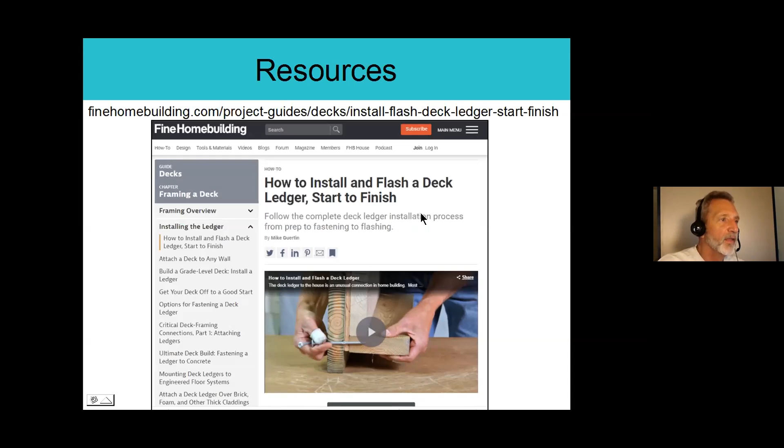Here's another one from a deck that Justin and I built back in 2012. So that was 8 years ago now. It seems like yesterday. So the process is pretty much the same there as well.

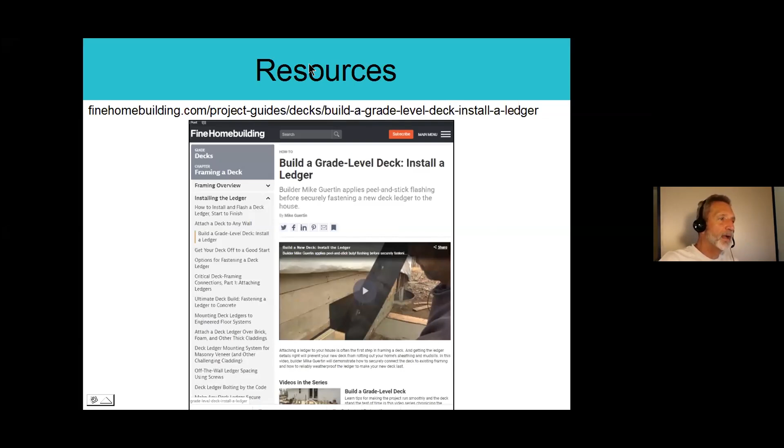I want to harken back a little bit to code things just to give us some grounding on what the code calls for and what it tells us and what it doesn't tell us, because a lot of things in the code can be confusing, or in some cases you don't actually know where to find the parts that apply to deck ledgers. There's one table, well, a lot of tables in the code.

I'm going to be referring to the 2018 International Residential Code, mainly because it's the most current, though we'll be coming out with the 2021 code by this coming August or so. It'll be available, and I expect this to be the same. But this in the 2018 code has been the same since, I think, 2009.

The only portion of the deck code that refers to flashing is a footnote to the table that gives the spacing for the fasteners, 1/2 inch through bolts and lag screws. Down at the bottom it says in that footnote, ledgers shall be flashed in accordance with section R703.4 to prevent water from contacting the house band joist.

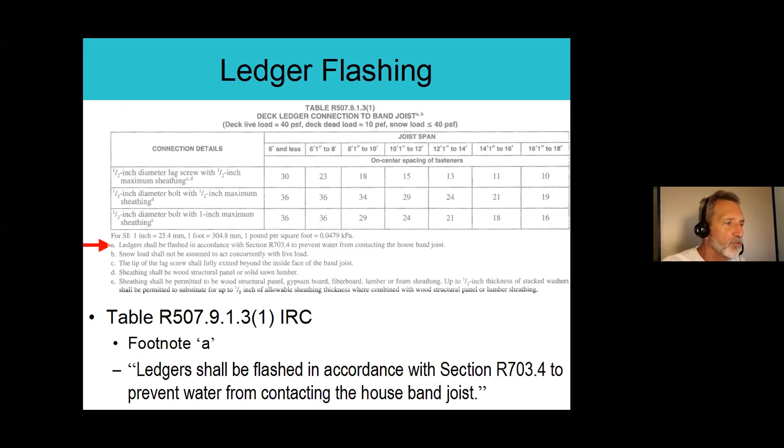So it doesn't tell us specifically what to do. Like a lot of the code portions, it'll tell you how many nails to put somewhere, how big something has to be, or how to install it. This just gives us a performance criteria. Then when we go and look at 703.4, there's a couple things that you want to pay attention to.

Let me go through this quickly. It wants a corrosion resistant flashing installed shingle fashion, meaning the upper part goes over the lower part, naturally the way you want to shed water mechanically. It's there to prevent water from getting into the wall cavity and damaging structural framing components.

Self-adhered membranes can be used as flashing, but they have to comply with an AAMA standard. Most flashing tapes used for window flashing would actually fulfill that requirement, and the same with a lot of roofing membranes. Even if not specifically designed for decks, you can use those as well if you decide to. You can also use fluid applied membranes.

The important part I want to point to, which I'll show in the slides, is that flashing shall extend to the surface of the exterior wall finish. So when we flash that ledger, we have to think about not only the top of the ledger and flashing over the top, but also what's happening at the bottom of the ledger, under the ledger.

It's not so much the case if you're building a grade level deck, but if you're building a deck that's going to have siding beneath it—say it's got a stem wall beneath it, or it's a deck on a second floor—then you're going to want to pay close attention to how you flash that.

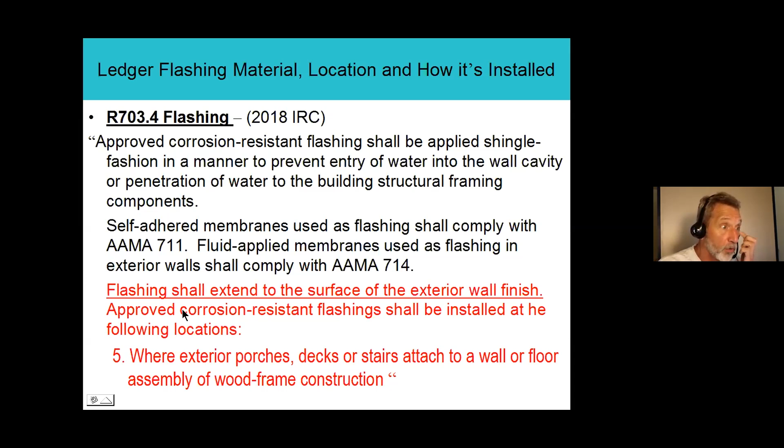Going a little further, and this is only in the 2018 code, in the deck code portion, it says flashing shall be corrosion resistant metal of nominal thickness not less than 19 thousandths of an inch, which is roughly 26 gauge metal, or approved non-metallic material that is compatible with the substrate of the structure and the decking materials.

The important thing there, and why it's italicized, is 'approved.' Whenever you see approved in a code section like that, it means approved by the local official. So the local official has some authority there when it comes to which flashings we can use.

In some cases, there are self-adhered membrane style flashings which, from the manufacturer's standpoint, are approved for use as primary flashings. But it still would need the thumbs up from your local official. That's a good thing to clarify with them before you actually start flashing a deck, if they're going to be doing an inspection on that.

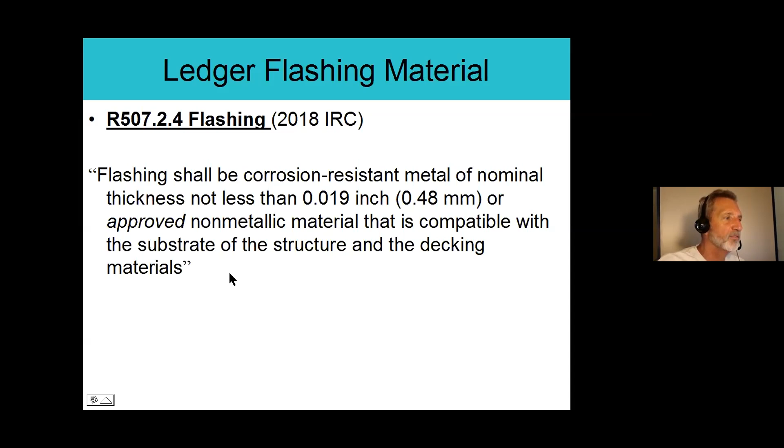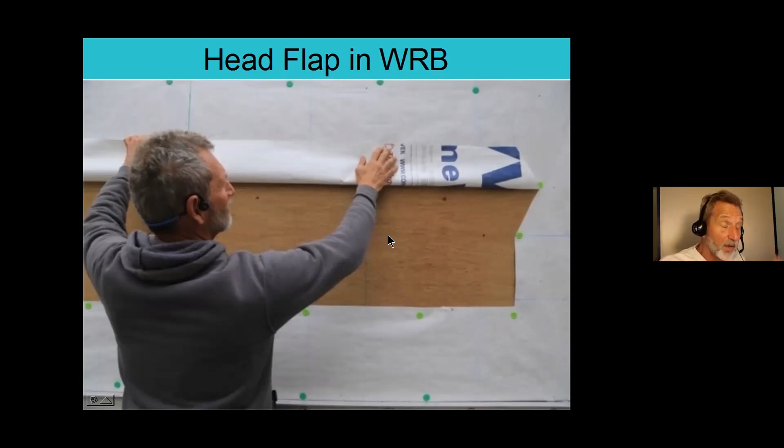Then I'm going to apply a piece of peel and stick behind the ledger. That's going to be my backup and my security policy to prevent the water from getting into the wall in the event anything happens to my flashing system above.

So the sheet that I cut is going to be 3 to 5 feet long. Now, usually I work alone or just with my brother or a helper. Though you can apply the membrane and roll it out across your whole area where the ledger is going to go, I find it's a lot easier to work in wingspan length pieces, 3 to 5 feet wide, something you can manage, especially on a hot summer day. You don't want to be dealing with something sticky getting stuck in the wrong spot, because you want as much control as possible.

Now the sheet itself, I make it 3 to 6 inches wider or taller than the height of the ledger board. So if I was using a 2x8 ledger, which is nominally about 7 inches, I'll make this at least 10 inches, and maybe up to 12 or 14 inches tall overall.

And then what you see me doing here is I'm going to take a straight edge and a very sharp knife, and I'm going to score just the release paper on the backside, or the release plastic, so that I can leave part of the release liner on the back portion, that bottom couple of inches.

That's going to enable me later on to integrate any of the siding below. That gets back to that code section where you have to drain all of your flashing out to the surface of your cladding, and this is going to help me do that.

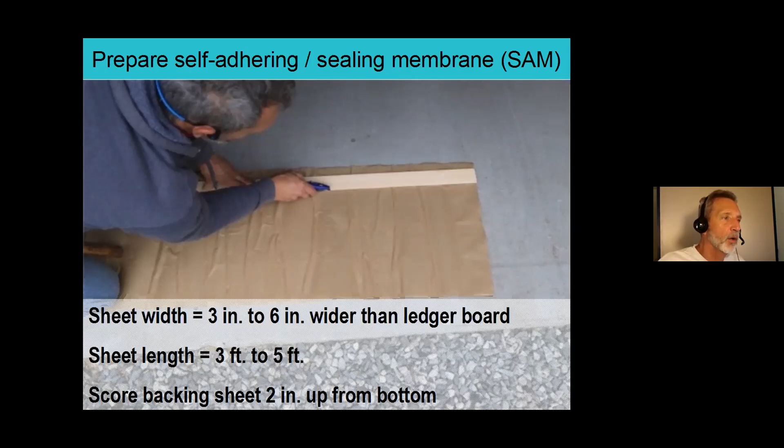Then I backfold the piece after I've made that score, so I can ensure I've got two separate pieces, and there are no little hairs of that backing sheet still stuck to the lower portion.

Now I've got a little video, if this works. This was a video we did at the Builders Show of the Olfa top sheet cutter. I'm just going to play this and see if it works, and that way you can see an alternative to using a sharp knife. There's actually a tool for that.

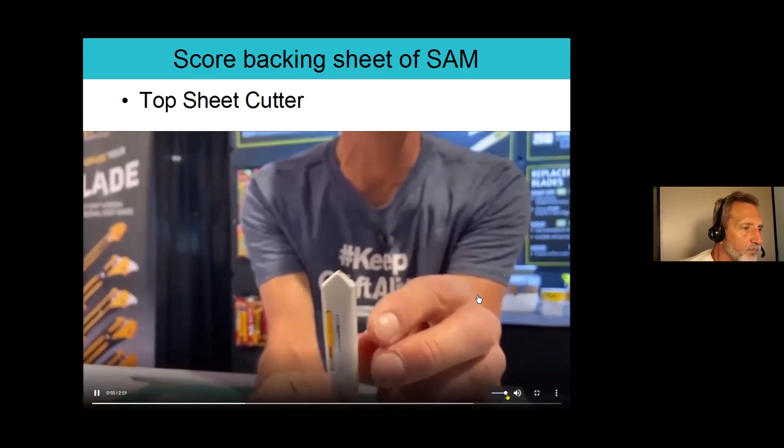It's got a knife blade which extends 1/32 of an inch when you push the slide button up. You can kind of see it here, it sticks out a tiny, tiny bit. And then on the back side over here, it's got a pressure slide, and what that does, depending on where it is, is put pressure on the tip of the blade, so it will control the depth.

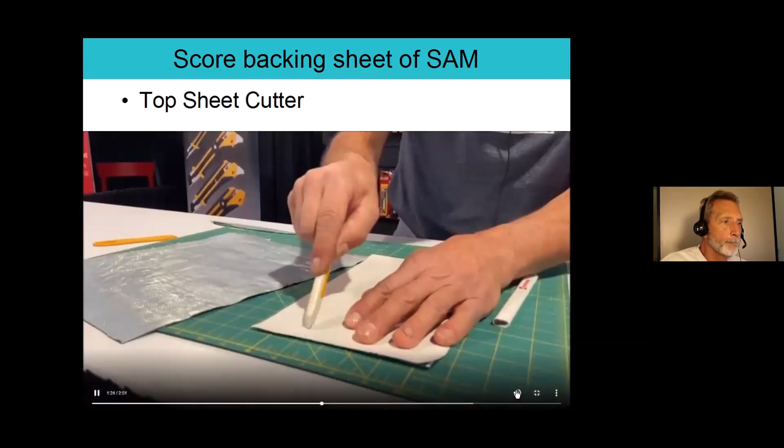So if I'm cutting through the thicker paper backing material on, say, this DuPont or Grace Ice and Water Shield, I'll push that all the way up. And now when I make a cut, it cuts just through the paper and doesn't cut through further.

Oops. Well, that's funny. I can hear it, but it sounds like some people can't hear it.

With this thinner plastic release paper, I'll dial this slide back just a little bit, and then when I go down and cut, it just scores through and doesn't go through into the adhesive, and now I can peel that off.

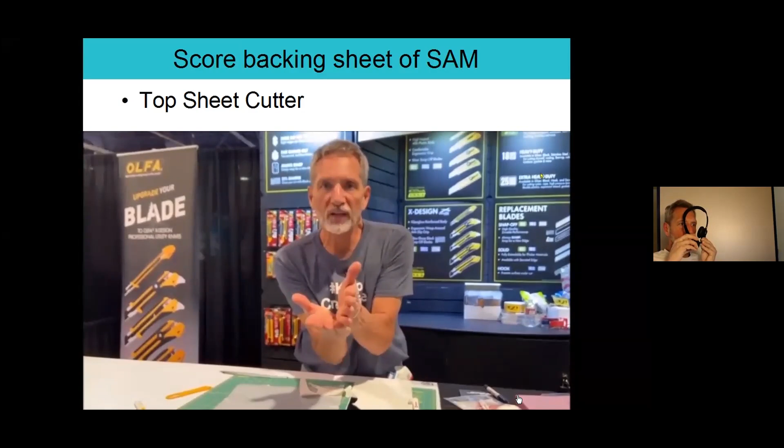Now, not that you'd ever do a curved line, but if you want to get an inside corner really tight, this is the way to go, because you can make a nice straight cut with a straight edge, and then peel that off, the release paper. You can leave the other piece on, and now I can fly that sticky side into that inside corner, bond it to, say, a wall, then lift up the other portion that goes down, say, on a roof, peel that release paper off, and then stick it down.

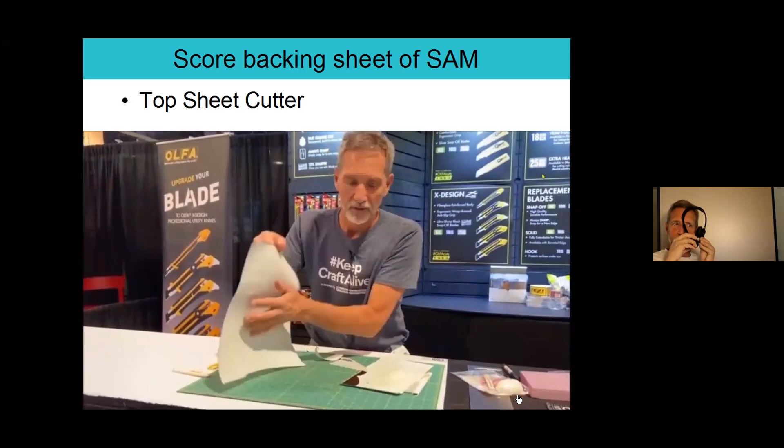It's got a nice... well, don't know if everybody could hear that or not. I tried to curl my microphone into the headset to see if it would help. Yeah, we could hear that, once you put the boom in. Yeah, it was just coming through your headphones.

Sorry about that. So basically, it was a tool - a specialty knife made for cutting coupons. That actually works really good for scoring the backing sheet without cutting through the face of the material. So now you can see it peeling off most of the release paper, the large piece, leaving the release paper down at the bottom, and then sticking that up on the wall.

Make sure that the top has about an inch or two that's going to be above where the top of the ledger is going to go. And then the bottom edge will stick down an inch or two, or maybe three, below where the bottom of the ledger would go.

When you are applying, since I'm only cutting these pieces like 3 to 5 feet long, I'm going to be overlapping the pieces successively down the run of the length of the ledger. I'm going to make an overlap between those sheets of about 3 or 4 inches.

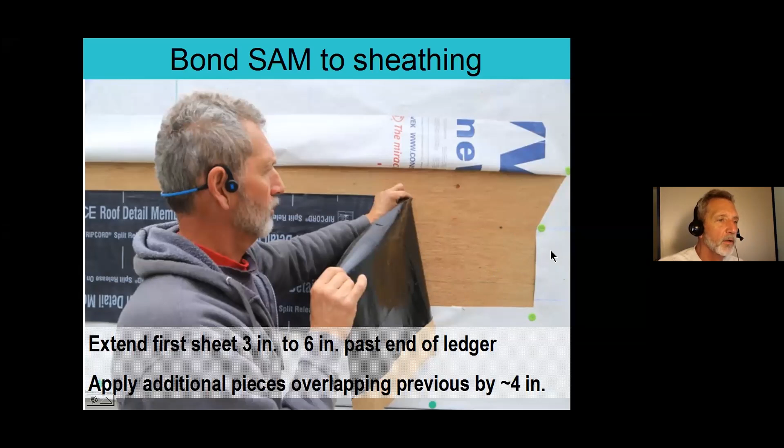And then the important thing here is that where the end of the ledger is going to go, which right now is that vertical cut in the house wrap, I want to make sure that this peel and stick goes 3 to 6 inches past the end of the ledger board. You'll see later on at the very last couple slides why that's important. Basically, it backs up the butt joint between the ledger board and the siding that gets installed later on.

So here we're just attaching the ledger board. You're going to have to snap a chalk line over the top just to control the height of the ledger where you're going to want that to be. But I've got 1 to 3 inches above, 2 to 3 inches below, and then 3 to 6 off the end.

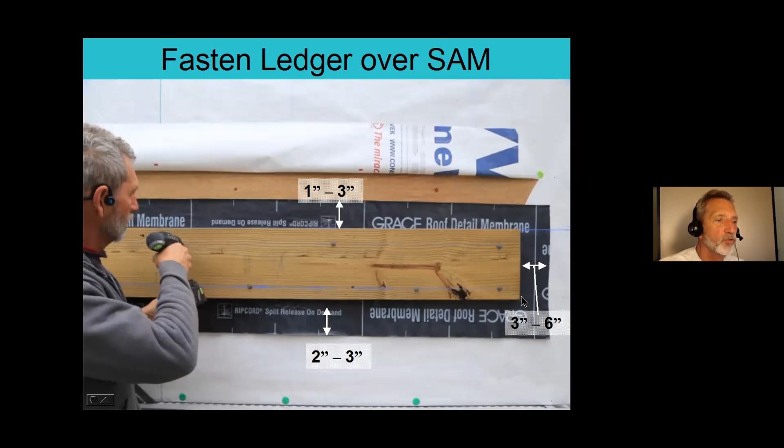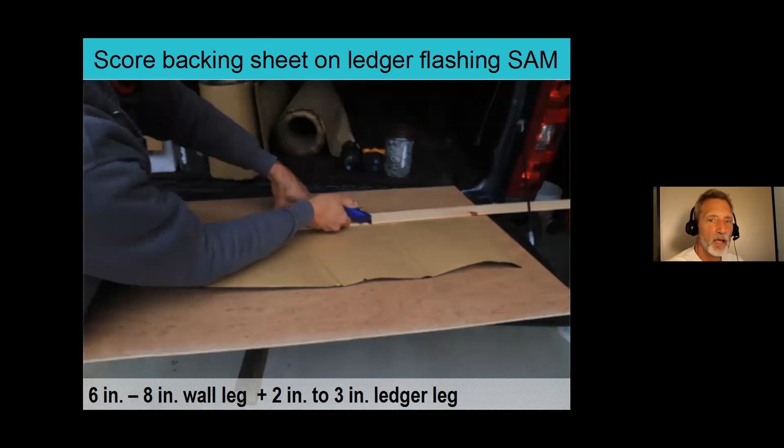Now I need to prepare a second piece, and this is going to be the piece that goes on top of the ledger board, and it's going to serve a couple functions. One, it's going to be the backup to the metal flashing, and the other purpose is as an isolation membrane - if I use a metal flashing, it's going to isolate the pressure treated lumber from the metal flashing so we don't have any galvanic reaction going on.

Now this piece here, I want to make it the width - well, it's going to need a wall leg, and it's going to need a portion that goes over the top of the ledger and then down a little bit on the face of the ledger. So figuring that I like to have 6 to 8 inches up for a wall leg, then 2 to 3 inches to go over the top of the ledger, and then a half inch to say 1.5 inches down the front of the ledger board.

I'm going to make this anywhere from an 8-inch wide piece to say a 12-inch wide piece. And then 2 to 3 inches from the bottom edge or one of the edges, I'm going to make that same score with a sharp knife or with that top sheet cutter. And that way I can position it on top of the ledger board.

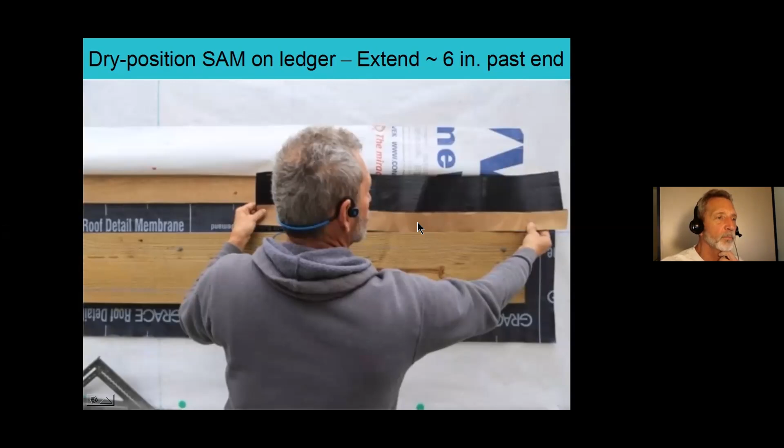Now the backing sheet's on the wall section, and the backing sheet is right now on the portion that'll come down over the ledger board that you see facing me, as I'm putting it in to get a nice tight position on there before I peel off the release sheet.

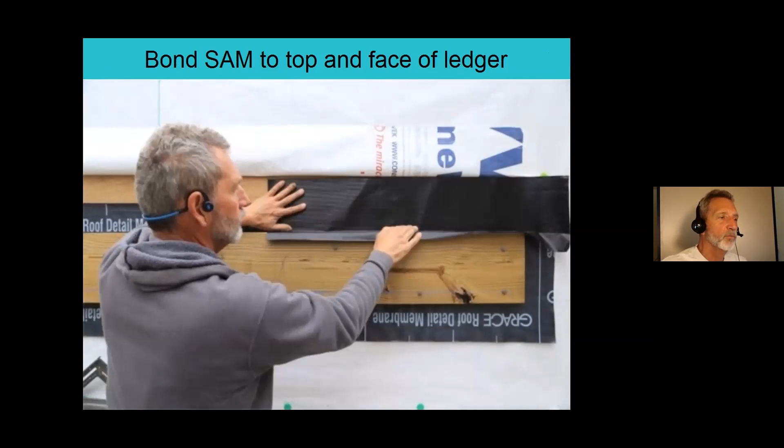Then I pull the piece off, and you could do it either the wall section first or the top of the ledger section first. I like to do the top of the ledger first. I'm going to peel that off and then bond it down to the top of the ledger board, then seal it down onto the face, and then make really sure that when I peel the release paper off the portion that'll be the wall leg, I get a tight inside press on the inside corner. I don't want to bridge the inside corner between the top of the ledger board and the wall itself.

Otherwise, I could have a problem where that could get punctured because it's just airspace behind it, especially when working with some thinner self-adhere membrane. Now you can use the self-adhere membrane I'm using here - just a couple of different pieces of different brand products. These are all asphalt based. That's fine. If you're going to use butyl based, make sure you do butyl based for both. You don't want to mix butyl and asphalt together. Sometimes they don't play well together, so you want to be compatible.

You can use regular ice barrier membrane, like the 3-foot wide sheets you'd use up on a roof, as your ice barrier, or you can just use sheets that come off the roll at the width you need. I've got a whole variety of pieces in one of my sheds, and I just pick and choose whatever suits the job.

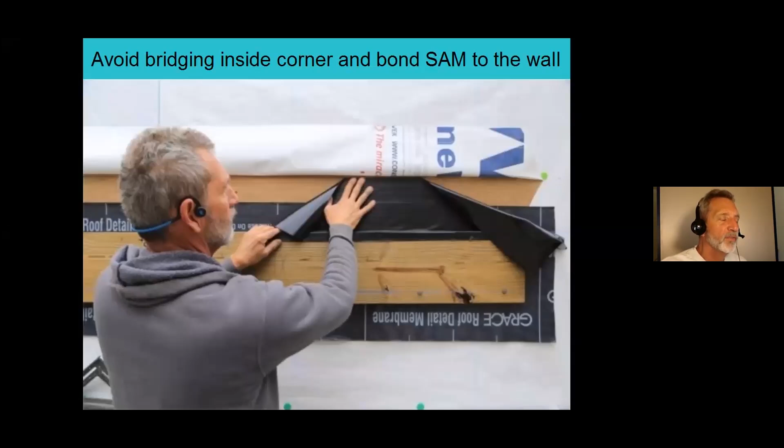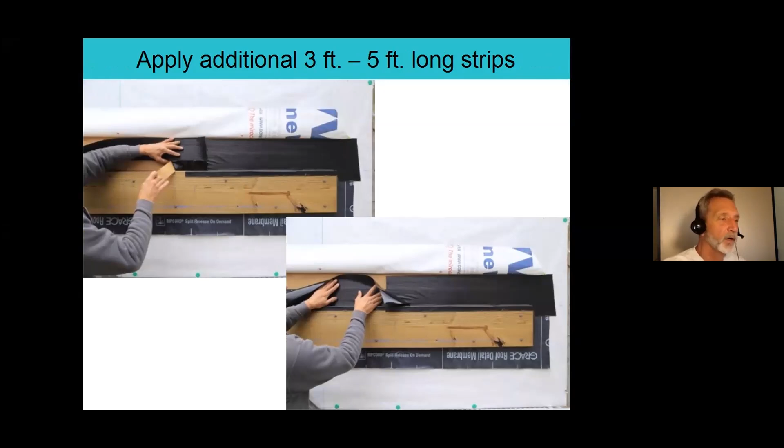After I've pulled off the release paper, bond that up on the wall, and at the very corner, there's the portion at the end of the ledger. Just make a little relief cut and fold the piece down around the end of the ledger and onto the wall. Successive pieces go in the same sequence: remove the bottom strip so it goes to the top of the ledger, then the second piece goes up onto the wall, and you work your way down the ledger board, whatever length it is — 16, 20, 30 feet.

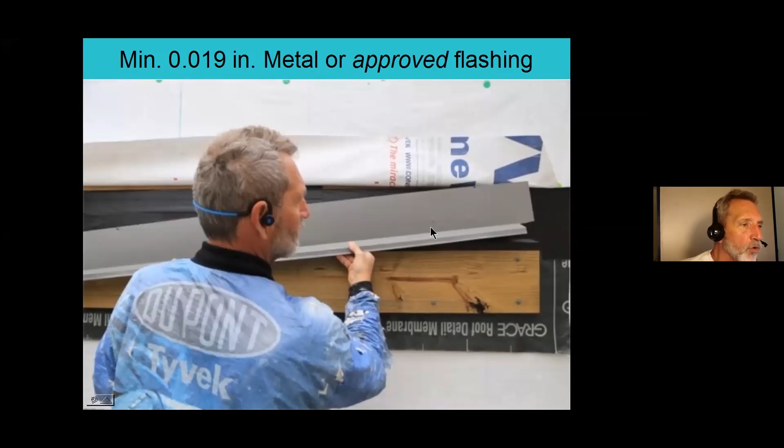Then putting a metal cap flashing on top of that. This could be metal or plastic cap flashing. Notice this has a fairly tall back leg — probably about a 5-inch wall leg. That would be the minimum height. I like to go with a 6 to 8-inch tall back leg on the wall. I'll show you why in a minute. Then that gets fastened in place.

I went to my local lumber yard to see what they had in stock for ledger flashing. The one on the left is a 1.5 inch mill finish aluminum flashing with a 1.5 inch tall wall leg — definitely not tall enough. You could install counter flashing over that, another piece of aluminum, galvanized steel, or copper over the top, and that would work, but you still need additional flashing going up the wall.

You're not going to be able to count on the house wrap and siding to cover over that sufficiently, so you need to extend a metal or plastic leg up taller. The one on the right was a galvanized steel flashing with a painted coating, with a 4-inch leg — the tallest they had. Neither of these could you use independently on their own; you'd definitely need a counter flashing if you were going to use either of those.

An additional thing about the one on the left: it fails, and many lumberyard and big box store stock flashings fail for ledger flashing, window flashing, roof flashing, and other cases because they're too thin. This one is only 11 thousandths of an inch thick, and almost all flashings on a house need to meet 19 thousandths of an inch. You might not think there's much difference between 11 and 19 thousandths — it's only 8 thousandths — but that's almost 50% thinner than it's supposed to be. So pay attention to flashing thickness because it impacts durability.

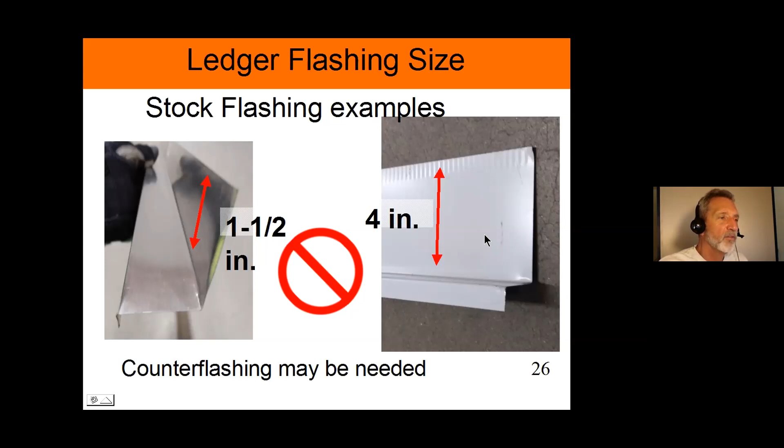The one on the right is 26 gauge galvanized steel coated, so it is thick enough. The reason you need a tall back leg is because the siding requires an exposure above your finished decking. Figure your deck boards could be an inch thick, maybe thicker, and depending on the cladding, there's a prescribed height you have to leave off the top of the deck surface — you don't want to be looking at house wrap or self-adhere membrane there. You want to be seeing primary flashing, plastic or metal.

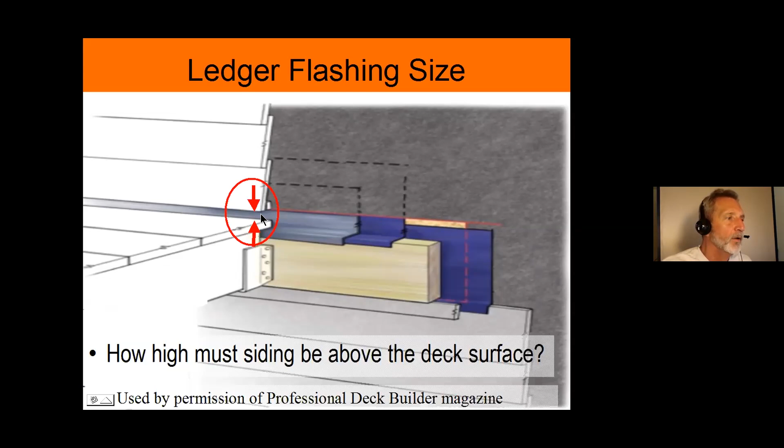Most of those are calling for, when I looked at them, between a half inch and an inch. Fiber cement siding will be by the manufacturer, and depending on the manufacturer will be 1 inch to 2 inches. Hardie fiber cement, for instance, requires a 2-inch exposure there above the deck.

And then composite wood siding, and that would go for composite wood trim as well, that would be by manufacturer. Most of them that I looked at, like LP SmartSide for instance, required a 1-inch space.

Those get overlooked a lot of times, because most carpenters like to see things tight. They like to have either the siding go down and the deck board go up to it, or the siding come down tight on top of the deck board, but really that's not proper. You don't find too many building officials enforcing this, though it is enforceable by the code, that exposure, but it's up to us to do it, and it's just good building practice.

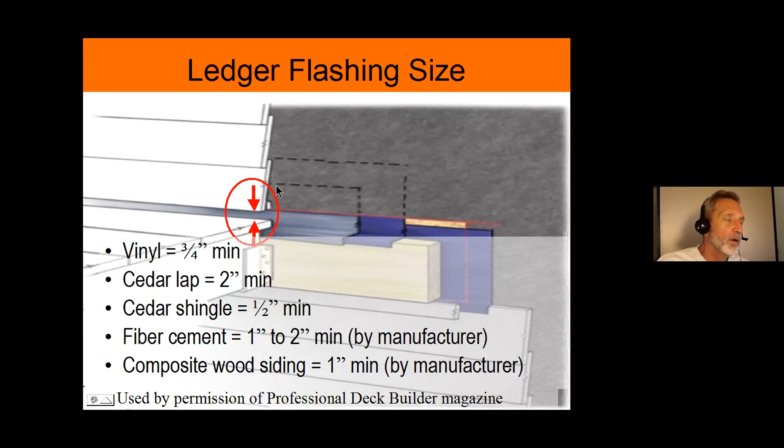And that's the reason why you need a tall back leg, because you're already going to lose an inch to the deck boards, and if you had fiber cement and needed a 2-inch space there, then you're going to need at least 3 inches just to the bottom of the siding. And then your top lap, you'd want at least 2 inches and preferably more of an overlap with your siding and so on. So just a way to get you to think about the flashing that you're going to use.

So what I usually do is I make my own flashing up, and that way I can choose the height that I need.

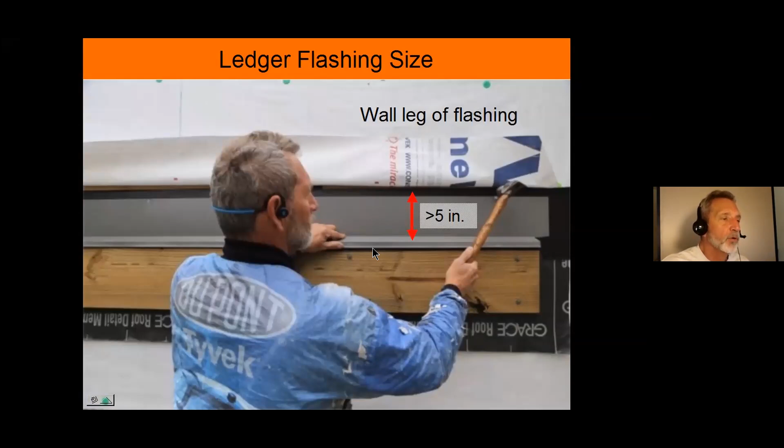There are other flashing profiles that you can use. I'm showing in my slides here a flashing which is like a cap flashing that comes down over the top of the ledger and then has a drop leg down on the face. That works fine. But if you're going to use a type of flashing that extends out over the top of the joist...

...this is common in some parts of the country, done for a couple of different reasons. One reason, and it's a good reason, is to shield the joist hangers from getting water flowing over them. We know there's a galvanic reaction that can take place between the pressure treated lumber and even the G185 coated hardware. To minimize the galvanic reaction, if you reduce the amount of water that piece of hardware is exposed to, you can increase its lifespan. By putting that flashing extending out, it will shield that hardware from seeing very much water.

On the downside, if you extend that flashing out more than where the joint between your first deck board and second deck board out from the wall are going to be, that's going to be a debris trap. And if you get debris collecting in there, you can grow all kinds of things. A friend of mine sent me a picture of a deck he was working on last year, and it had a small maple tree starting to grow up, about 4 inches high.

But the same thing's also going to happen at the back here where the wall occurs, where the flashing's hitting the wall and the deck board on top of that. So we really got to think about how to drain water at that point. It's not something you often think about, draining water over the flashing, because you're counting on that flashing to shield everything under it from getting water to the ledger board. But you also got to think about the water draining over that flashing under the deck board so you don't end up with debris collecting.

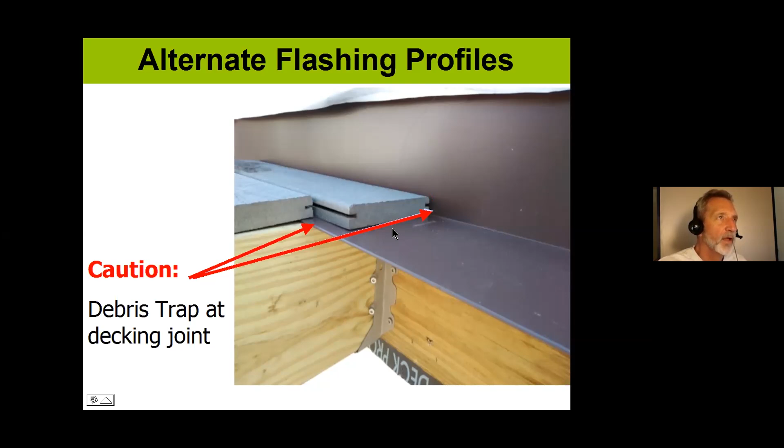Not all homeowners are very meticulous at maintenance, so it's a good idea to make things a little more maintenance free for them.

So what I like to do, if I'm going to use that type of flashing where it extends out over the joist top, is to use either some cedar shingles. If you put a cedar shingle over the top of the joist and the top of the flashing, and these only have to be 1.5 inches or 2 inches wide, you'll elevate the decking off of the flashing so the water can flow down behind the deck board, provided you leave like a half inch gap there.

Water will flow down, it'll help the debris flow down too. You won't be trapping moisture or decaying debris there that can't be washed out easily with a hose.

The problem you end up with, if you're just using a 16-inch tall shingle, is you will be kicking up those last 2 or 3 deck boards by 3/8 of an inch over the course of that 16 inches. Not a big deal. I've done it, I just did it on a deck that my helper and I were refitting with some new deck boards.

And you really don't even notice it. But if you don't like the idea of that rapid transition up to 3/8 of an inch, then what you can do is take some pressure treated scraps, or just a leftover board, say a 6-foot or 4-foot pressure treated 2x, and rip it into taper strips, so you can have that transition extend further out, be it 3 feet, 4 feet, 5 feet, whatever you feel comfortable with.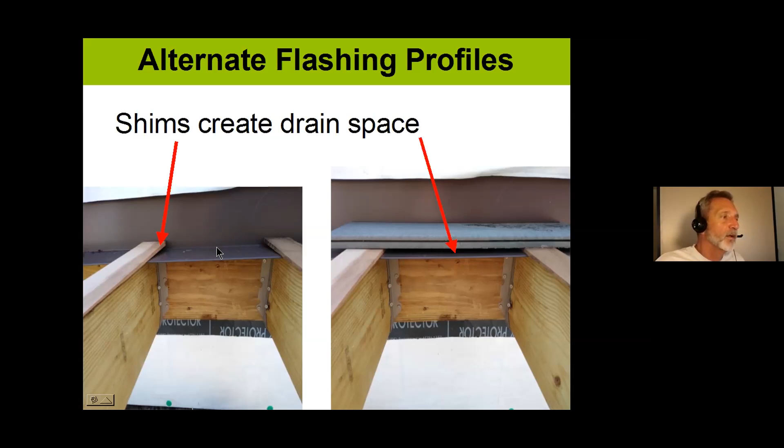But the idea there is, if you get that flashing to have a space with the deck board, it's going to help out a lot.

One of the things I do whenever I set up, because I like to put a cap flashing on, and I don't generally put that extended flashing over the top of the joist, is drop my ledger boards 1/2 of an inch. That way I can make the cap flashing have a wall leg, and instead of a 90-degree bend on it, I bend it at about a 5% or 10% slope, and let that slope downwards.

That way it enables you to bring the deck joist that 1/2 inch higher than the deck ledger board. If you hold the first deck board off of the wall by 1/2 or 3/4 of an inch, which you're really not going to notice anyway, water can flow down behind the deck board against the wall section, then under the deck board, and down over the ledger board itself. Just different things to think about.

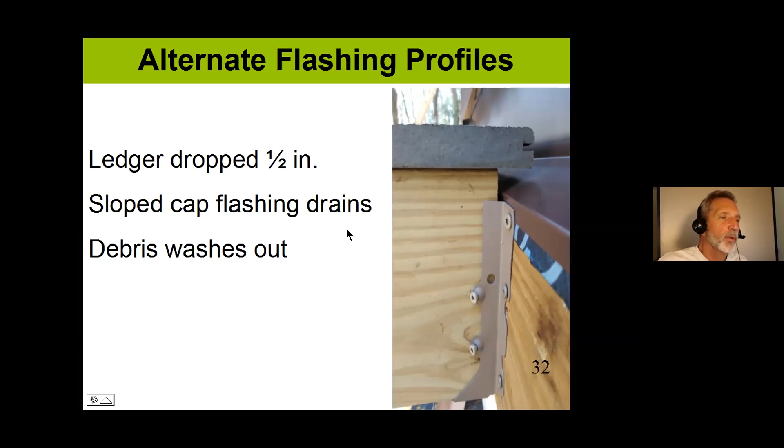Whatever way you want to approach it, just think about how you get the water to flow over that cap flashing without trapping it by the deck board. It's just going to help everything move better.

Then the house wrap comes down over the top. If you're using one of the WRB integrated sheathings, what I would recommend at this point is to use a fluid applied system and just tape that in, and then paint it in.

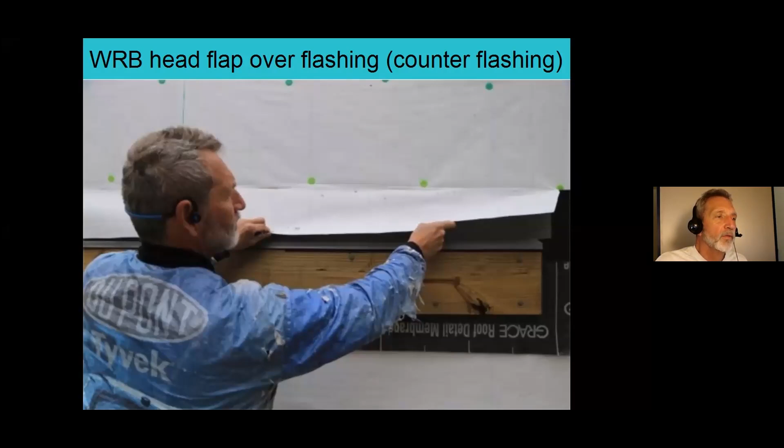Or if you want, just use another piece of flashing tape over the top of the metal flashing to tie it into the sheathing, then use whatever brand tape corresponds with that sheathing so it wets in properly to the WRB coating on the sheathing. Just like a head flap on a door or window, tape off that diagonal corner where the house wrap folds down over that upper portion.

Now I'm going to bring the siding up from underneath the bottom of the flashing. This wouldn't be the case if you had a grade level deck where it's just going to have the foundation down below that. You don't have to worry about that because it would just be dripping over the foundation.

But if you've got siding coming up underneath, bring the siding up to next to the last piece, lifting up the piece of the self-adhered membrane that was extending down below the ledger board, where I left a release sheet on.

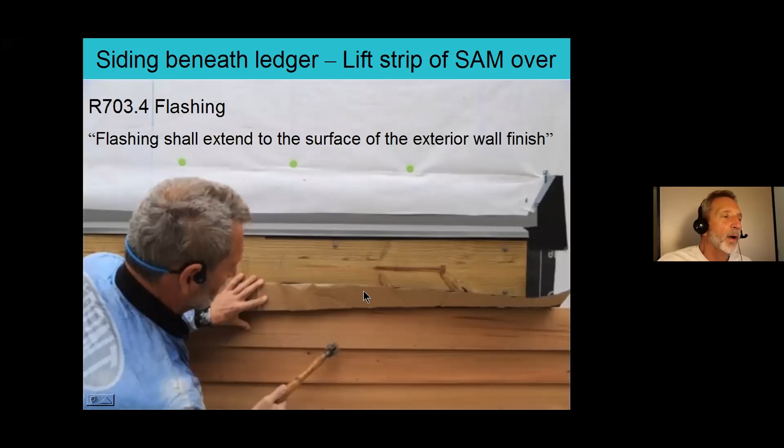And now I can extend that flashing tape over the top of the siding and then trim it off for either the last piece of siding or the trim. So you're not going to let that stick down and be exposed, you're going to trim it off 1/8 or 1/4 of an inch higher.

And then you can install, in this case, I've just got a ripped down piece of clapboard that's going to trim that off and cover it up. Now some people worry about putting that piece of trim or siding directly over that flashing tape because they're afraid they might be trapping water should it weep around the bottom of the ledger board and back to the wall and hit that membrane.

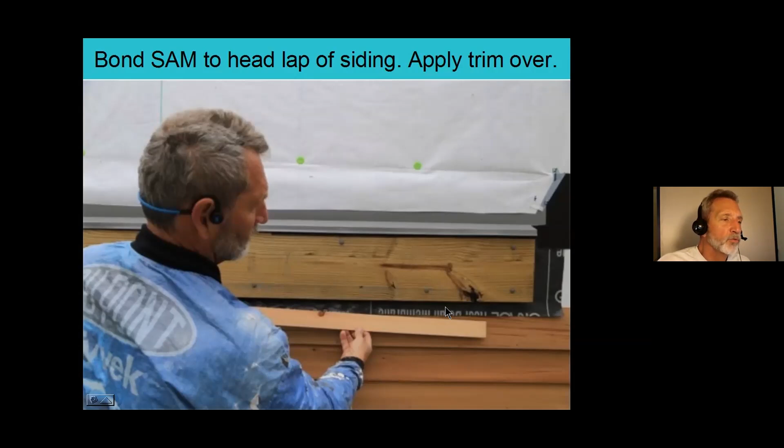If you're worried about trapping moisture in there, then what you can do is take some toothpick size splinters of wood that you carve off of a scrap, and tuck those under that piece of trim or siding after you tack it on over that self-adhered membrane.

Now you notice over here at the very end that we've got the self-adhered membrane, that 3 to 6 inches that I let it extend past the end of the ledger board. That is a joint that you'll have later on when you bring the siding in and butt up to the end of the ledger board. By having that membrane extend, you don't have to worry about that butt joint, whether you caulk it or leave it unsealed. Water getting into that joint will end up flowing down behind the siding at this point, because you've got that membrane over the top of the siding. It's going to enable the water to flow in that joint, down, and get cast out onto the surface of the siding where it's not going to do any harm.

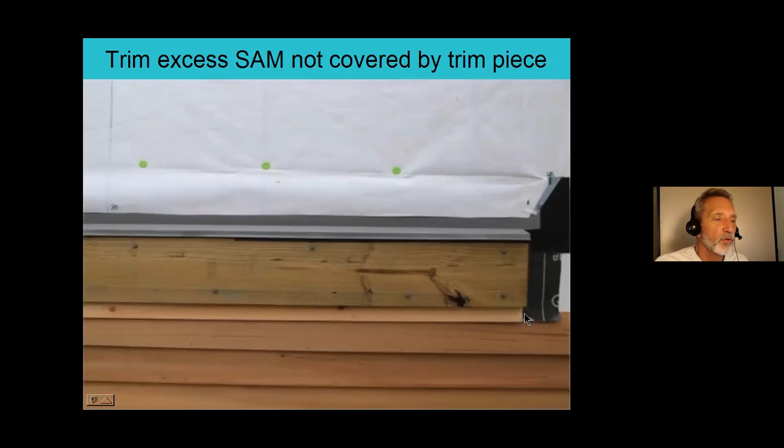Think of that like you would a slip sheet or a joint backing sheet, either tar paper or a piece of sheet metal or plastic, that you might put between the butt joints in the field for regular lap siding or clapboard when you install it. So it's serving the same function here. This is where the butt of the siding will go up against the ledger board and against that trim piece down there, kicked out on top.

All right, we've got some alternatives. So that's the big thing with the flashing, but I want to look at some alternative ways to deal with ledger boards and manage the water. Here's one way, and this is allowed by the code. In fact, the code tables for fastening your ledger board include a section on spacing the ledger board 1/2 inch off of the wall using a 1/2 inch stack of washers. This allows for the 1/2 inch of sheathing, and then you would have a 1/2 inch space.

Then what you need to think about is how you're going to protect the wall behind the ledger board. You could use aluminum coil stock. I like to use some coil PVC stock, some bendable PVC trim stock, and I'll just run that through there. You could also use a piece of self-adhered flashing tape, provided it's the type that is UV stable, so it can be exposed at this upper portion here where you may have the siding coming down.

So you could use the self-adhered membrane there, or you could run the self-adhered membrane, and then where the upper part is, where the deck board is spaced back a bit and sunlight could hit that ordinary flashing tape, you could just put a piece of aluminum coil stock to cover where the sunlight would hit it. As long as you've got something back there protecting the wall sheathing and keeping the water out of the wall, that's all that's required.

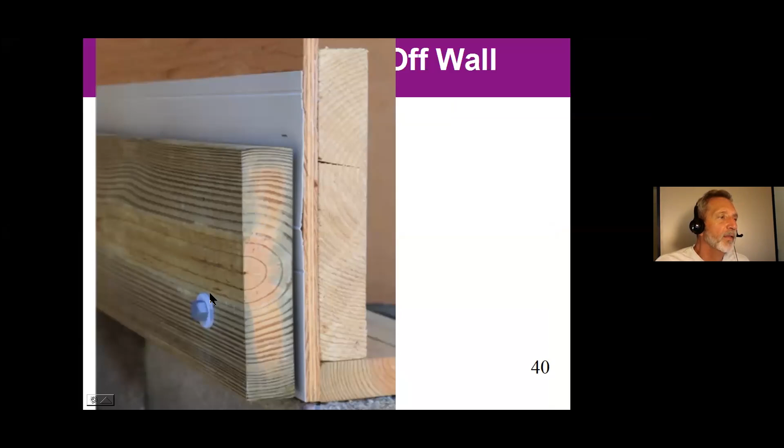It's used in some parts of the country almost exclusively, which is why it got included in the code. But it's not for everybody because of that concern. This is what it would look like - this is the plastic coil stock that I use, and I just run it back there, with the washers behind it. You can't really see them in this mock-up detail.

Now there are two types of these fasteners or spacers. One is made for 1/2-inch through bolts, and the other is made for structural screws, so you don't even have to use through bolts with this connection.

Both Fasten Master and Simpson Strong Tie allow for this, though you have to dig into their technical bulletins to find it, but they both allow their screws to be used with a modified fastener pattern for FastenMaster's LedgerLOKs, as well as the Simpson Strong Tie SDWS and SDWH screws. You just follow the patterns they call for, and you can create that space using screws.

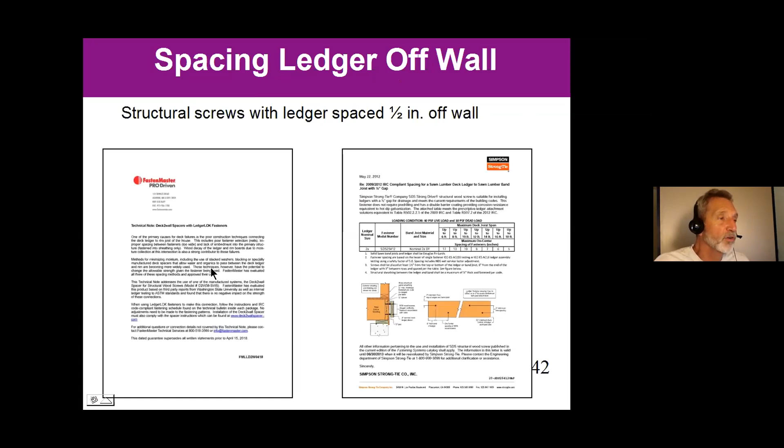What I'm going to move to now is showing you, if you want a real thermal break, there are some other devices you can use that create that same space but give you a much bigger space that you can actually install some exterior insulation over and get even more thermal value out of that.

So this is the Maine Deck Bracket, and I've used it on quite a few jobs. It enables you to not only put additional insulation over the wall and then put the insulation around the flange that's on here, but you can also run your cladding, your regular siding, right through it.

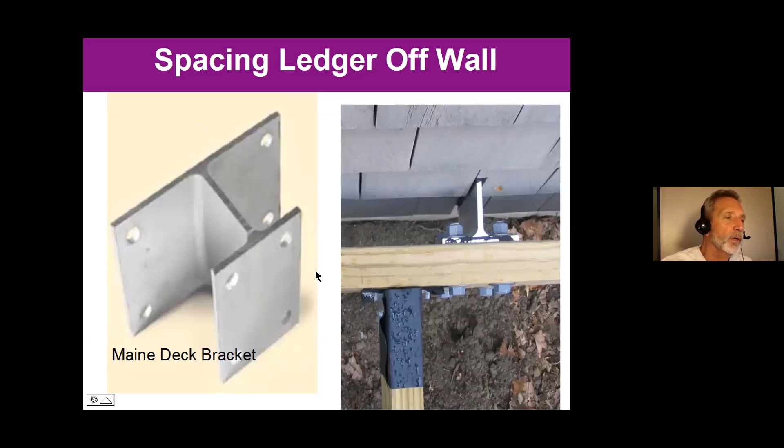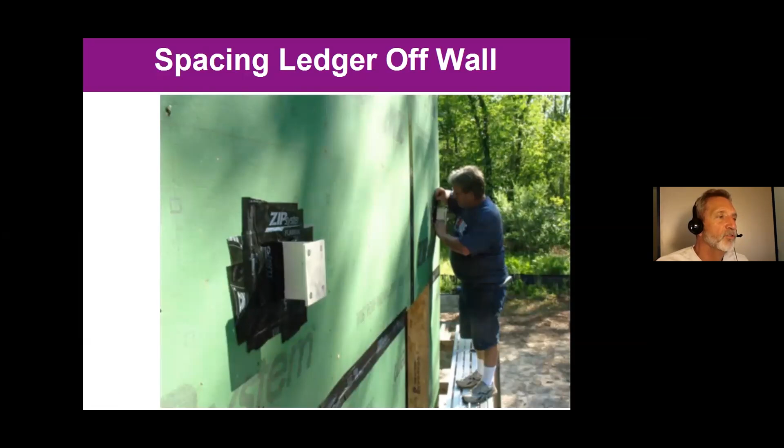What I like to do when I install these is put them on the wall at the framing stage, though I've also done them as retrofits. It's a little more difficult depending on the type of siding you're putting on, but you can just flash that right into your wall system and then attach the ledger board, then install your exterior insulation and siding after, or you can install the exterior insulation before you put the ledger board on. So whichever way you want to do it, you can just do it with the regular progress of your installation of the exterior insulation, siding, and ledger, depending on the sequence you're following.

The nice thing with these is they have an ICC evaluation service report, and they're rated for 1,000 pound capacity each. You just have to follow the manufacturer's instructions, and you can find that at, I think it's called deckbracket.com. There are other systems as well.

This is the BR brick bracket. It's made for installing when you are going to be putting regular veneer brick with a 1-inch airspace behind it, which is great, but it can also be used if you're going to install a ledger where you want either the siding going down behind the ledger board all the way through, or the way I use it, if I'm going to be installing exterior insulation over the wall. So it just gives you an extra thickness.

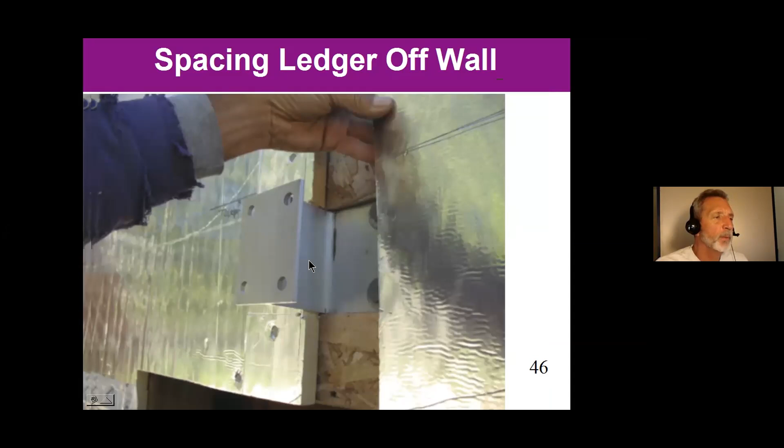The Maine Deck Bracket only has about a 3¼ inch or 3½ inch space that you can get out of that extension. The BR brick bracket, I think, has 5¼ inches. This does not have an ICC evaluation service report, though they do have an engineering test report, so you just have to submit that engineering test report to your local official if you're going to use that.

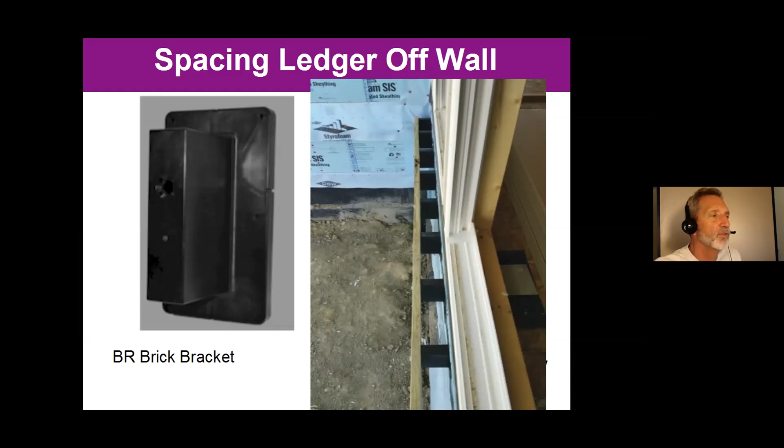Then there's another one that does have an ICC evaluation service report. This is the Metwood deck bracket. It's been on the market for a few years. Again, like the BR brick bracket, it's made for installing with a brick veneer with an airspace behind it. It has about a 5-inch throw between the wall attachment flange and the flange that you would connect your ledger board to.

It has a little leg that sticks out at the bottom to help support that ledger, but you also drive some machine screws that come with the kit into the face of this that support the ledger board, and that gives you the 5 or so inch space off of there that you could put insulation back there or run your siding.

So there are some other options if you want to space the ledger off the wall without having to run cap flashing over the top. But there again, you could, and you can think about this for people who are concerned about the way you're making this attachment and then putting flashing tape over it, and maybe that might leak.

If you aren't using it for the purpose it's intended, which is brick veneer, you could install this, run your exterior insulation up behind it, but break your exterior insulation at this point, and then put a cap flashing with a wall leg against the wall sheathing that comes out over the top of that bracket and then down over the face of the ledger board.

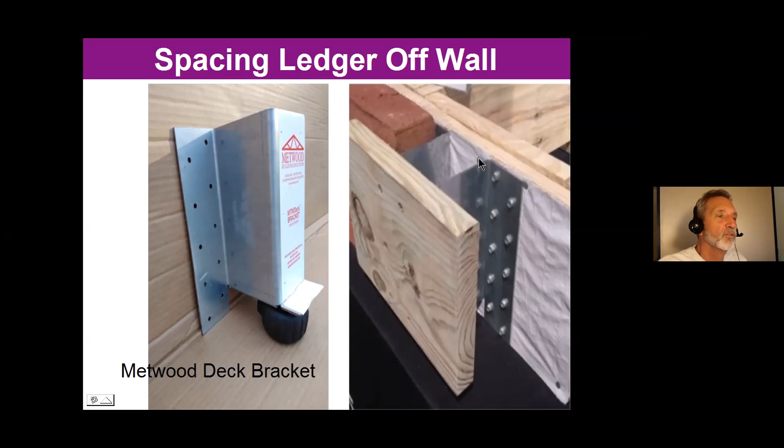So you can still use these with the normal cap flashing, but it gives you the opportunity to attach a ledger, though this session isn't really intended as a ledger attachment presentation. I'm really presenting these as options for flashing, but you can also integrate these with a conventional flashing. So just take it as an option there.

Moving on to cantilevered floor joists. I remember 30 years ago, the first time I was framing a house where we sistered the pressure treated deck joists alongside the house floor joist, and we let these stick out about 4 feet without any outside support. It was a little balcony off of a door, off of a master bedroom.

And we didn't really think a whole lot about flashing. We just butt our clapboard to it and ran some silicone, and that was it. When I think back to that, I cringe every time, because chances are the water got in after that silicone deteriorated, whether it was a year later or 5 years later.

Since then, I've used a bunch of different systems, and it wasn't until flexible flashing tape came out that I really had something I felt comfortable doing myself. Before that, I used to have a local metal worker guy who did copper work actually fabricate up saddle flashings, one that went up around the bottom of the joist, one that went down from the top. But those are expensive, especially if you have 5 or 6 floor joists out.

Now with flexible flashing tape, you can basically do it yourself, and it's done much the same way as you would doing a penetration that goes through the wall. So I start out with some flexible flashing tape, and there's any number made for windows and doors that you can grab, whether they're asphalt based or butyl based, as long as it's compatible with the house wrap or the weather resistant barrier integrated sheathing.

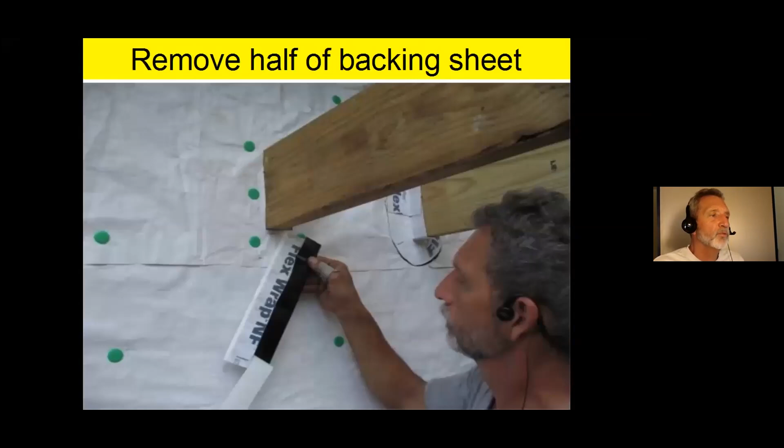Here what I've done is taken a piece of the flexible flashing tape that's about 4 inches wide and about a foot long, maybe a little longer if you've got 2x12 joists. Then down the middle, I use a sharp knife trick, or I use the top sheet cutter to score the back of that release paper so I can separate it in 2 steps. So I remove the release paper on one portion, and that's going to wrap around the bottom of the joist and up around the sides.

Then I press it tight against the side of the joist, and you can see how on the side it's extending about 2/3 of the way up on the left and right side of those joists. You don't want to just make it so it only goes halfway up. You want to make it go a good portion of the way up, and then the mating piece from the top will give you an overlap there.

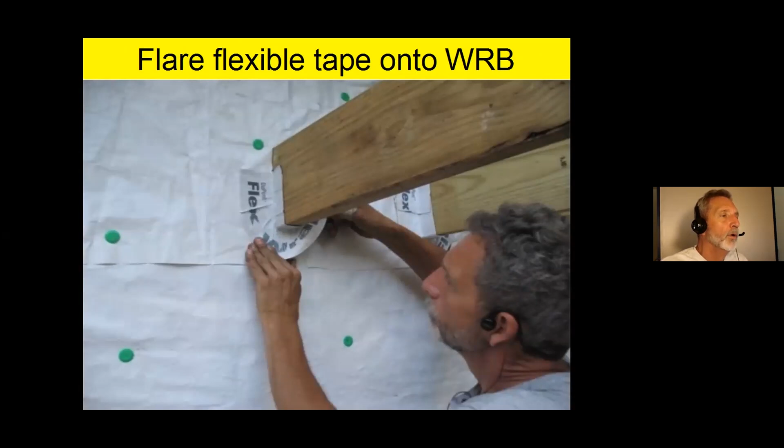Then after you've bonded it to the joist, you can pull the second part of the release paper off and flare it down over your house wrap or weather resistant barrier integrated sheathing. Then make a second piece identical to the top, and cut a little head flap in your WRB. That second piece follows the same sequence.

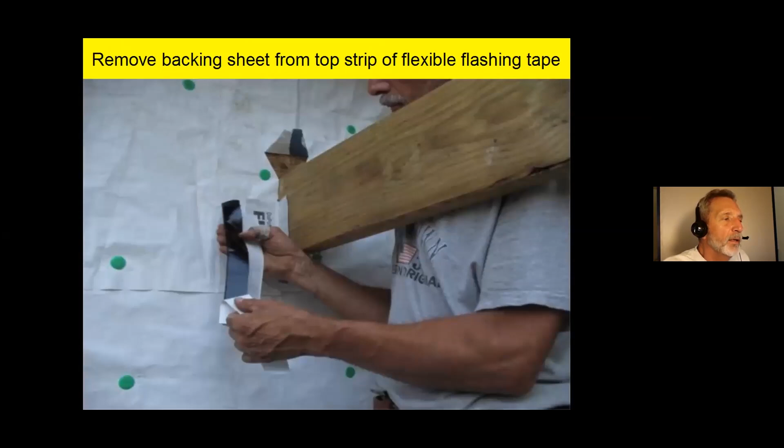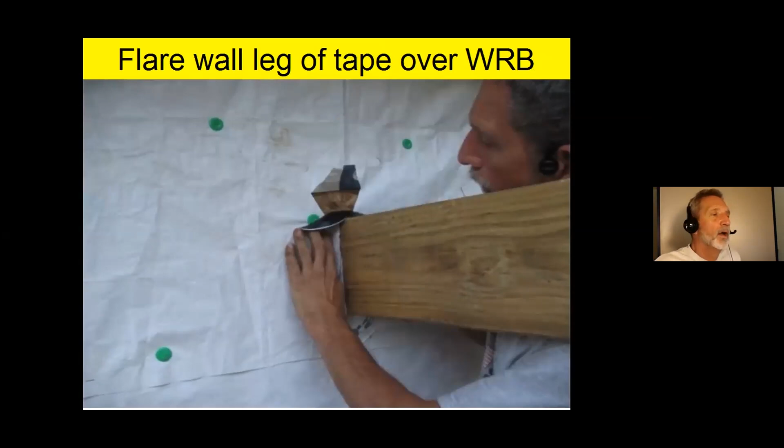You're going to take part of the release paper off and leave part on, drape that down over the top, then press it down tight against the sides, pull that second piece off, and then fold and bond that up onto the wall under that head flap. Then the head flap comes down, and you tape over that at the corner to give you this pretty good, weather-tight flashing around the side of the joist.

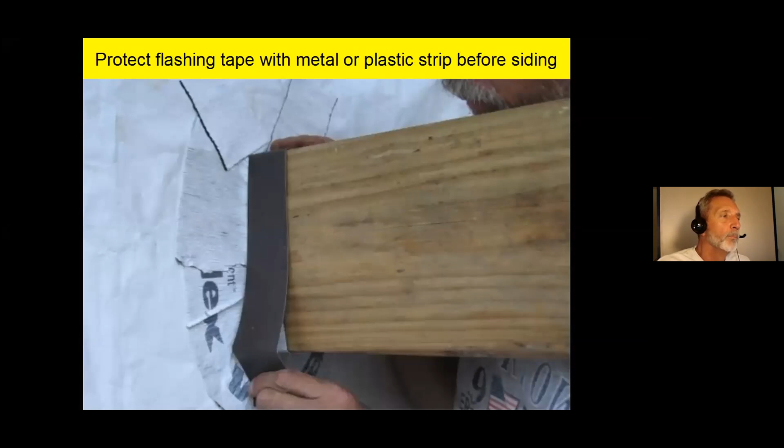Now these tapes aren't made for exposure to sunlight, and even though it's going to be under your deck, there might be a little bit of sunlight peeking through at the joints in the decking. So what I recommend is to take a piece of coil stock, a thin piece of wood, or a piece of plastic coil stock, something you can wrap around and over that. Not only does it shield it from the sun, it also gives it a more attractive appearance, especially if there's going to be space below where people will be walking beneath these joists and looking up at them. You don't want them to see the flashing tape because it might be a little wrinkly if you didn't do a good job installing it.

And then the siding can butt right to that. Use whatever sealant you want between the end of the siding and that metal. It's really only there to fill the gap, for painting purposes, it's not really there as a seal. The seal is back here at the flashing tape level.

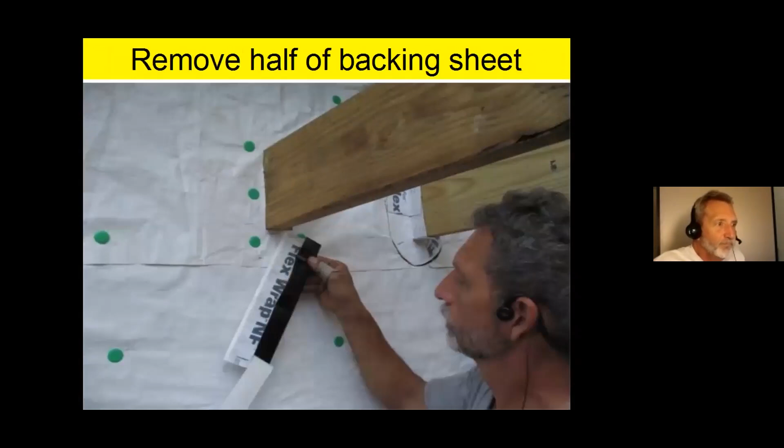One thing I wanted you to talk about, Mike, was when you were talking about the stacked washers. What is the method you use to logistically get those stacked washers into place?

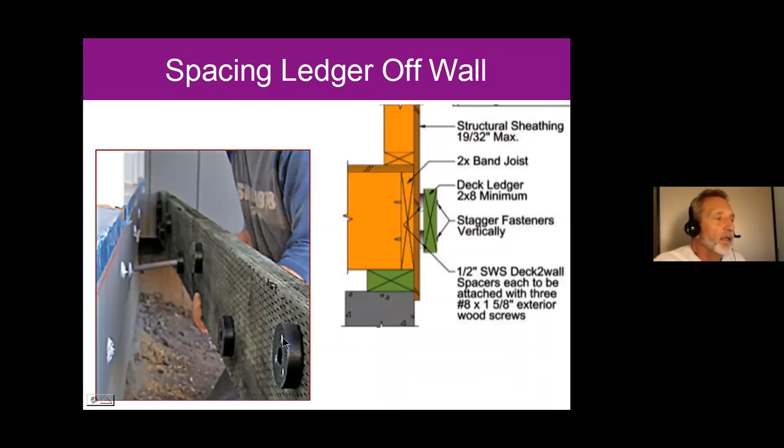Yeah, what I found works best, and you can see it here with the deck to wall spacer, is they have little screws that drive in. So what I'll do with the washers is I take the washers and first off I use some CA adhesive, you know, super glue.

And then I take a piece of just regular house wrap tape and tape it to the back side of the ledger board. I've tried doing it without super gluing them together. The problem is they kind of shift in that little group, because it's like 5 or 6 washers to make up the half inch. If they shift just a little bit and you don't glue them together, the bolt, when you try to push it through, ends up banging against one of them and you're just pulling your hair out.

So super gluing them together, or if you've got time and you're not in a rush, you could use any type of adhesive and just stack them up with panel adhesive or something, making the little pile of them. You couldn't set that up so the nuts are on the outside of the ledger, could you?